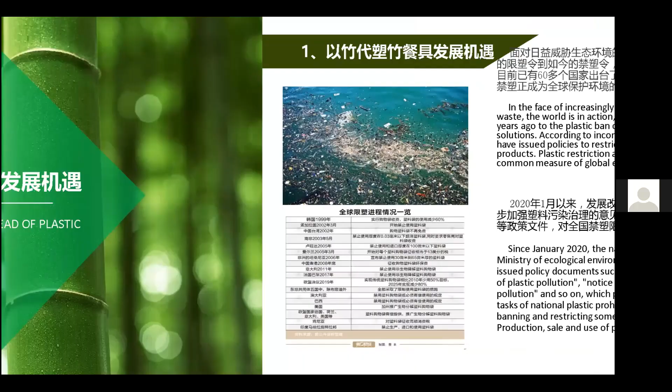Firstly, the bamboo tableware instead of plastic. In the face of increasingly threatening plastic waste to the ecological environment, the world has been in action since the plastic restriction order more than 10 years ago, and now with the plastic ban order, countries are actively looking for proper solutions. According to incomplete statistics, more than 60 countries have issued policies restricting or prohibiting disposable non-degradable plastic products. Plastic restriction and prohibition are becoming the consensus and common measures of global environmental protection.

Since January 2020, the National Development and Reform Commission, the Ministry of Ecological Environment, and other departments have successively issued policy documents such as Opinions on Further Strengthening the Control of Plastic Pollution, the Notice on Solidly Promoting the Control of Plastic Pollution, and so on, putting forward clear requirements for the phased tasks of national plastic prohibition and limitations. By 2020,

in certain areas, we have implemented the relevant policies already. By 2022, the consumption of disposable plastic products will be significantly reduced. By 2025, the management system for the production, circulation, consumption, recycling, and disposal of plastic products will be basically established, and plastic pollution will be effectively controlled.

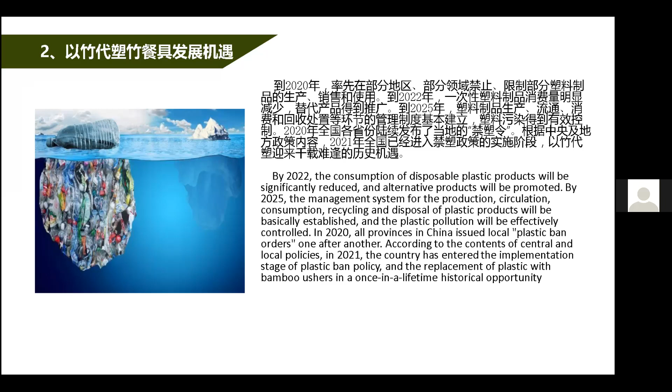In 2020, all provinces in China issued local plastic ban orders one after another. According to the contents of central and local policies, in 2021 the country entered the implementation stage of the plastic ban policy, and the replacement of plastic with bamboo ushers in a once-in-a-lifetime historical opportunity.

The opportunity for the development of bamboo tableware: coping with climate change, starting from replacing plastic with bamboo. On December 11, 2019, the International Bamboo and Rattan Organization and the International Bamboo and Rattan Center of the State Forestry and Grassland Administration of China jointly hosted the Bamboo Instead of Plastic side meeting to address climate change in the China Corner of the 25th Conference of the Parties to the United Nations Framework Convention on Climate Change.

The meeting aims to explore the potential and prospect of bamboo in solving global plastic problems and reducing pollution emissions, publicize bamboo's policies and actions to cope with climate change, promote the international community's attention to bamboo's natural solutions, and encourage all parties to integrate bamboo resources into national development strategies and action plans.

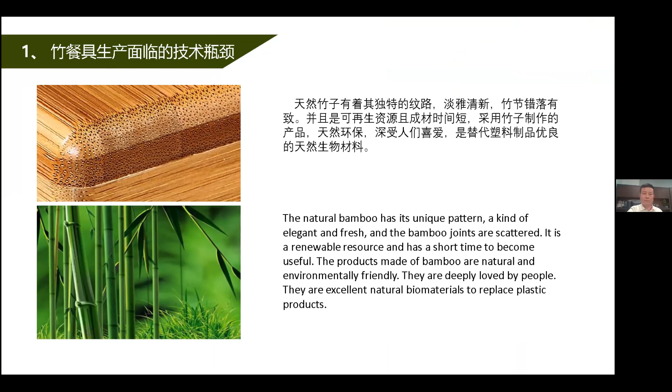Secondly, the technical bottleneck of bamboo tableware production. Natural bamboo has its unique pattern with a kind of elegant, fresh smell, and the bamboo joints are scattered in the right order. It is a renewable resource and takes a short time to become useful. Products made of bamboo are natural, popular, and environmentally friendly. It's a good material, a good replacement material for plastics.

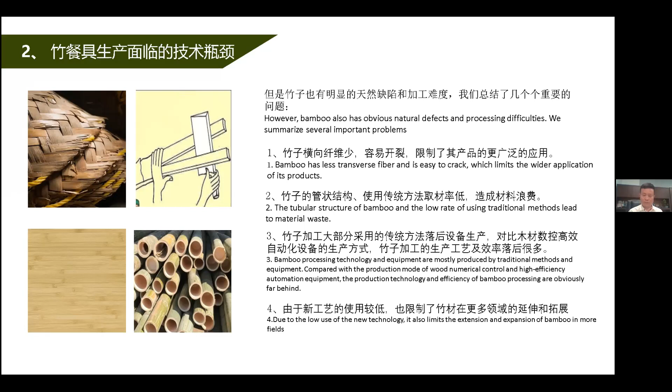But there is a natural difficulty in processing, and technical bottlenecks as well. Firstly, bamboo has less transverse fiber and is easy to crack, which limits the wider application of its products. Secondly, the tubular structure causes a low rate of material use with traditional methods, leading to waste. Thirdly, bamboo processing technology and equipment are mostly produced with traditional methods, which is less efficient, and due to the low use of new technology, it also limits the extension and expansion of bamboo into other fields.

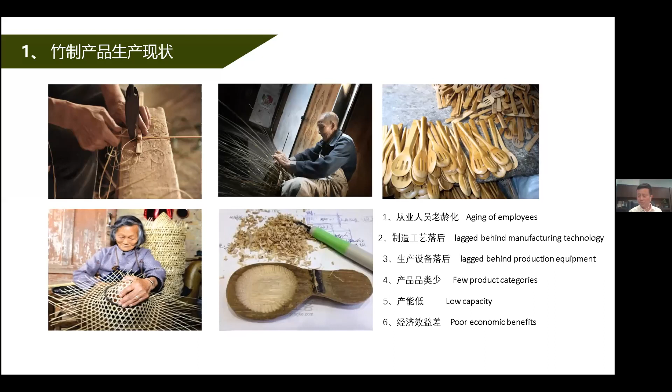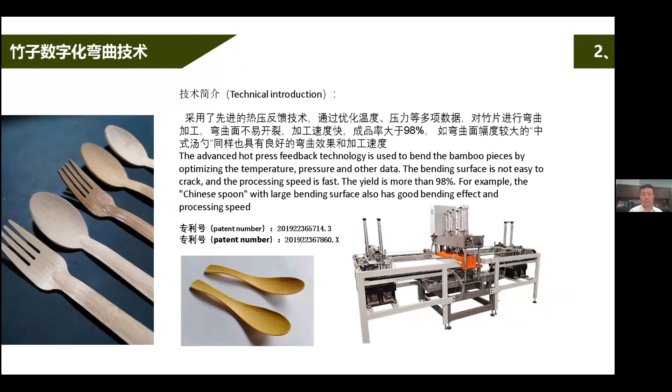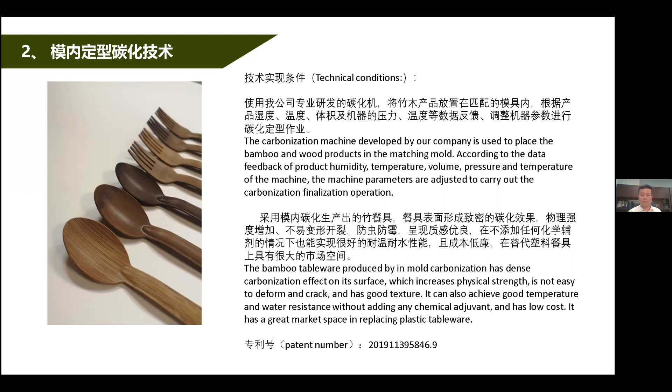Secondly, the in-mold setting carbonization technology. The carbonization machine developed by our company is used to place bamboo and wood products in the matching mold. According to the data feedback of product humidity, temperature, volume, and pressure, the machine parameters are adjusted to carry out the carbonization finalization operation. The bamboo tableware produced by in-mold carbonization has dense carbonization effects on its surface, which increase physical strength, is not easy to deform and crack, and has good texture. It also achieves good temperature and water resistance without adding extra chemical elements, and it has low cost. It has a great market space in replacing plastic tableware.

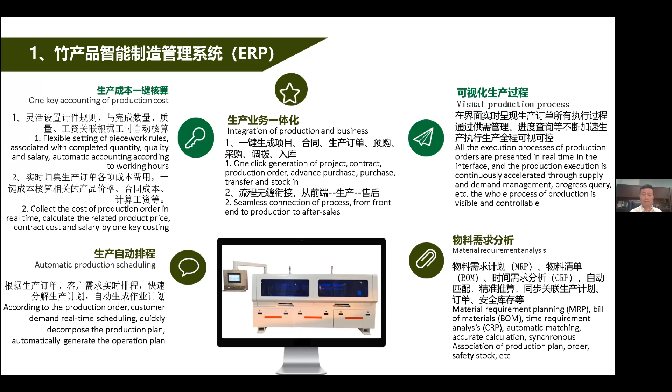Fifth, the efficient automatic production of bamboo tableware, using ERP integration of production and business. One-click generation of production contract, production order, advance purchase, transfer, and stocking, with seamless connection of process from front end to production to after sales. This includes automatic production scheduling, material requirements analysis, visual production process, and one-key accounting of production costs. This is actually a quite professional and complicated problem, and I won't go into much detail today.

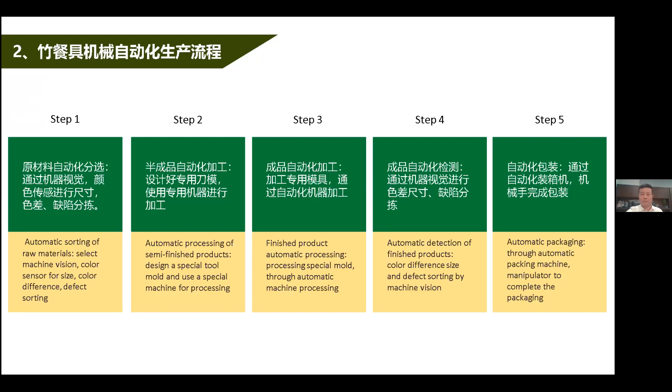Secondly, the automatic production procedure. Step 1, automatic sorting of raw materials, using machine vision and color sensors for size, color difference, and defect sorting. Step 2, automatic processing of semi-finished products. Step 3, finished product automatic processing, through automatic machine processing special molds. Step 4, automatic detection of finished products, checking color, sizes, and defect sorting by machine vision. Step 5, automatic packaging.

So finally, the company profile. Let me introduce my company briefly. Shanfeng Zhidong Technology Company was established in 2014. It's a comprehensive company integrating technology, R&D, intelligent manufacturing, sales, and maintenance. We are committed to the R&D of bamboo plastic substitute product technology and efficient automatic production equipment. It has successfully developed automatic production lines of disposable bamboo knife, fork, spoon, straw, bamboo coffee stick, and bamboo pan, etc. We continue to expand the use of bamboo instead of plastic industry, and we apply the technology in industry, agriculture, commerce, and various other fields.

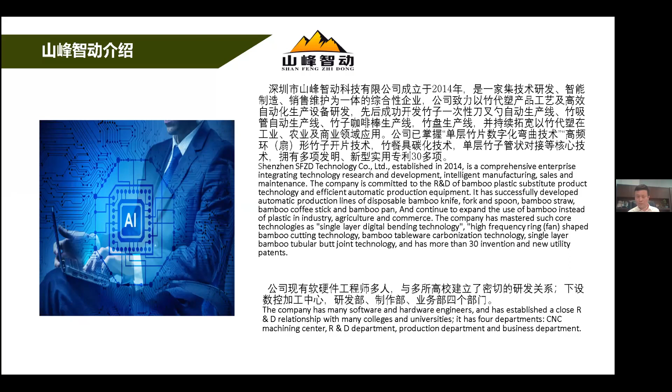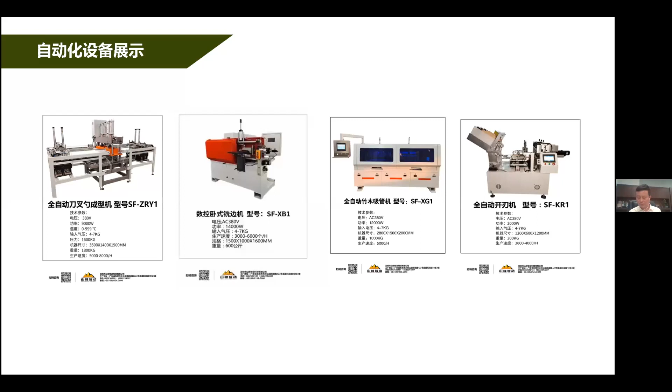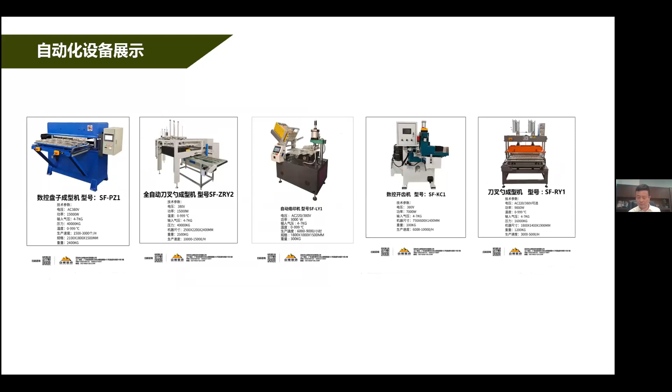So here is the display of the machines developed by our company. Here are some of the examples. We have tens of thousands of machines here, and we won't be able to go into details here.

Thank you, Ms. Liu, for your excellent presentation, especially this video which is very attractive. It's very impressive to see automatic manufacturing of bamboo tableware. Due to increased demand for bamboo tableware both in domestic and international markets, your technology will be very popular. And I hope you can also develop automatic technologies for wide bamboo processing.

Now the second speaker is Dr. Dai Wujun, Professor of Shenyang University, visiting Professor of National Advanced Packaging Material Engineering Research Center of Hunan University of Technology. Three major scientific research achievements of new bamboo materials, such as replacing plastic materials with bamboo, new pollution control products with bamboo, and green aldehyde-free building materials. He is the main researcher and inventor for 18 national patents. Dr. Dai's presentation is on carbonized composite bamboo woven geogrid, composite bamboo woven bag, and soil and water improvement using compound bamboo leachate and bamboo carbon. Dr. Dai, please.

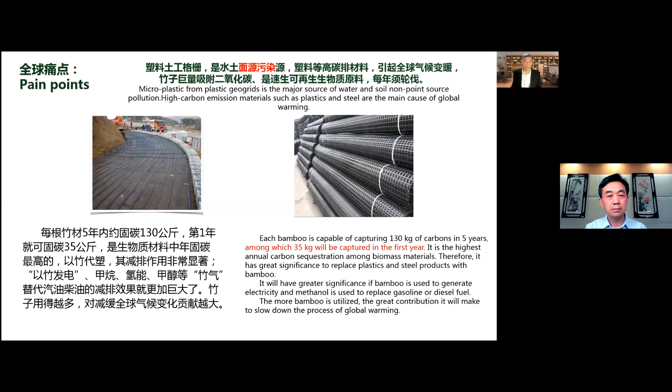About 20 to 30% of these bamboos should have been felled annually with an output of around 3 trillion yuan. But most of the felled bamboos are not utilized, but left wasted, which is a great pity.

Bamboo is famous for its strong capacity for carbon sequestration. Each bamboo culm is capable of capturing 130 kilograms of carbon in a 5-year period. This is possible thanks to the nodule bacterium in the bamboo roots.

Bamboo is able to sequester carbon because we use 1-year-old bamboo to produce our products. The bamboo is able to sequester 35 kilograms of carbon in the first year. I'd like to emphasize that 35 kilograms of carbon in the first year is the highest among all biomaterials.

In contrast, PVC or steel products are known for their high carbon footprint. Therefore, it is of great significance to replace plastics and steel products with bamboo.

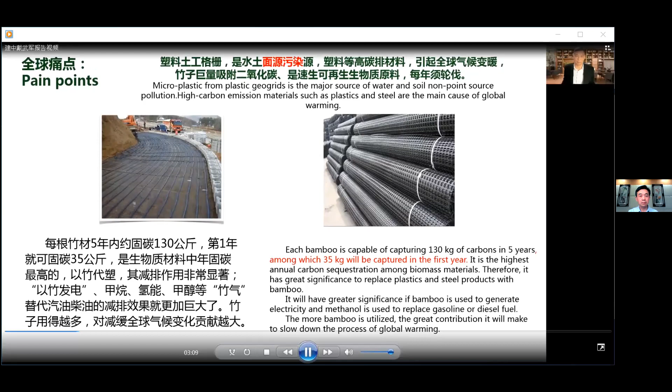Bamboo products can be used to produce green aldehyde-free building materials, to curb pollution, and to generate electricity. It will have greater significance if bamboo is used to produce methanol as an alternative for gasoline or diesel fuel. Therefore, it is fair to say that the more bamboo is utilized, the greater contribution it will make to slow down the process of global warming.

In light of this, promotion of carbonized composite bamboo geogrids will help reduce production and usage of plastics, as well as their pollution to water and soil.

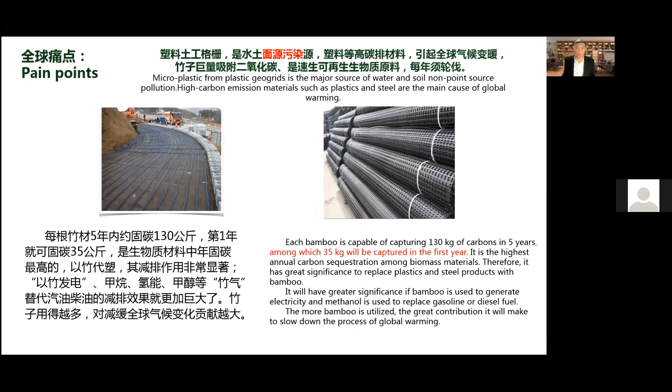Now, I'd like to introduce the first series of products to replace plastic. They include bamboo microfilament composite packaging materials, which will be used to replace plastic non-woven bags and plastic bags. In the near future, they can even be produced to replace other plastic packaging material.

Carbonized composite bamboo geogrids are used to replace plastic geogrids. Composite bamboo microfilament materials will be used to replace single-use cutlery and cups. Carbonized bamboo composite pipelines or pipes are produced to replace plastic pipes.

Now, I would like to give a brief detailed introduction to the carbonized composite bamboo geogrids that have already been put into operation.

The bamboo slips unearthed from Mawangdui tomb in Hunan province have stayed almost intact for more than 2,000 years. Today, we have good news to share with you, friends.

By working with academicians, doctors, and experts from Sun Yat-sen University, Chinese Academy of Sciences, INBAR, Tsinghua University, and Hunan University of Technology, we have made breakthroughs with 6 patenting technologies after 9 years of hard work.

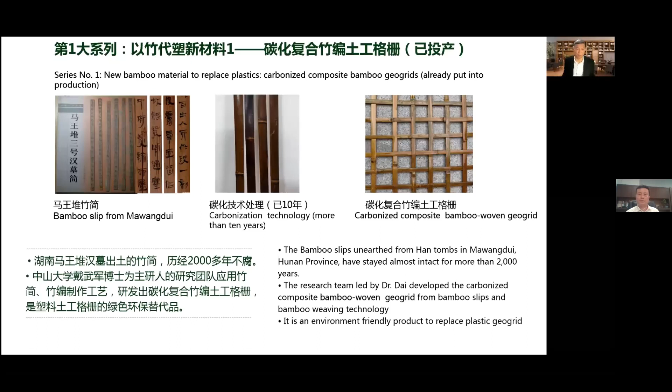Among these experts are President Tang Yiming of Hunan University of Technology and Dr. Dai Wujun from Sun Yat-sen University. The experts applied the techniques of bamboo slip making and bamboo weaving to develop the carbonized composite bamboo geogrids. So it is a great achievement.

President Xi Jinping makes it clear that the production, sales, and use of certain plastic products should be banned and restricted in an orderly manner, and the alternatives for the plastic products should be recyclable and biodegradable.

After the meeting, the government issued a ban on plastic products. I'd like to stress that on August 20th, 2020, the Guangdong province issued another ban on the landfills of plastic products. This indicates that microplastics in the soil are polluting the environment. In other words, they are detrimental to the environment.

To quote the UN meeting on climate change, bamboos are renewable energy with great potential to replace plastics.

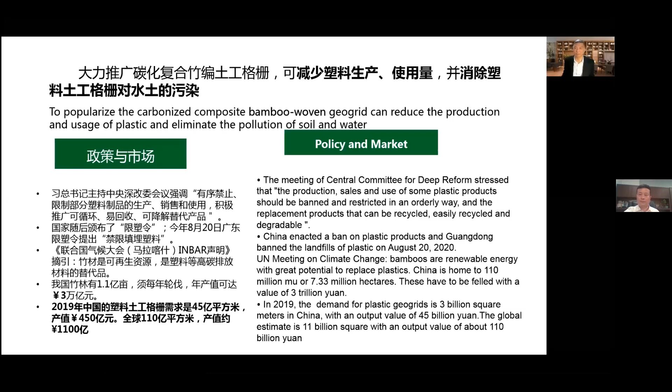Then what is the demand for plastic geogrids? In 2019, China's demand for plastic geogrids was 4.5 billion square meters with a value of about 45 billion yuan. Globally speaking, the demand was around 11 billion square meters with a value of about 110 billion yuan.

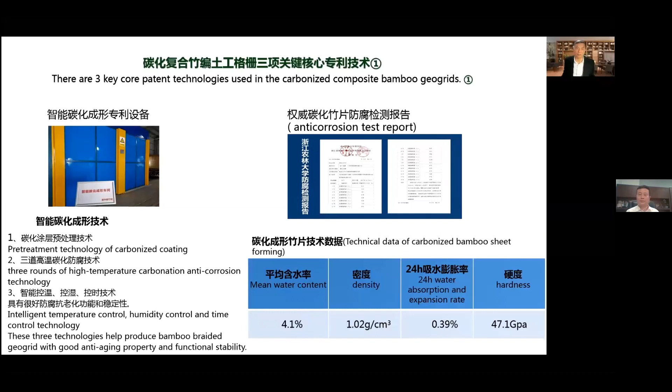Now let's look at the 3 key patent technologies used in the production of carbonized composite bamboo geogrids. Tech number one is intelligent carbonation technology, which can be further divided into three aspects.

Technology number two is CNC vertical and horizontal stress bamboo weaving technology, which also can be divided into three aspects: A, CNC automatic feeding technology; B, vertical and horizontal stress forming technology, which is based on the traditional bamboo weaving technology.

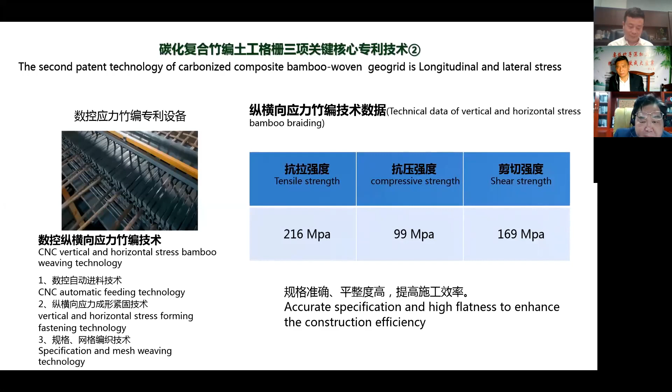This is also the highlight of this technology. The third, or C, is specification and mesh weaving technology.

Tech number three is also a core one: the polymeric bamboo weaving composite technology. This process is applied after the weaving and carbonation are done.

Aspect number one is the exclusive formulation technology of natural polymer strengthening agents. This natural agent is exclusively our invention. Aspect number two is the

polymer reinforcing agents with CNC dip and coating technology. The third one is compatible technologies of polymer strengthening agents with bamboo weaving technique. This is applied because the wax in the bamboo is not compatible with the polymeric strengthening agents, but the issue can be resolved after the carbonation treatment.

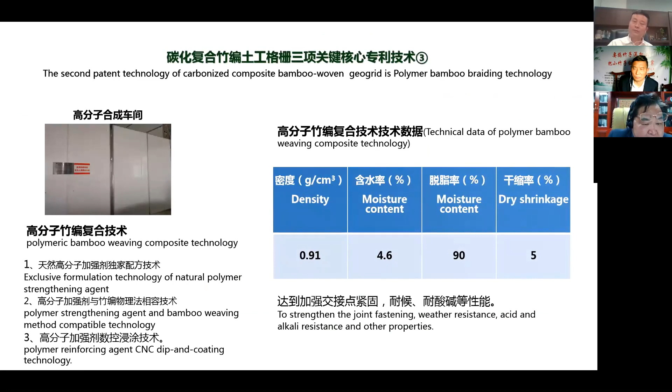Here is the on-the-site shoot of the production line of our carbonized composite bamboo geogrids, and now we have 5 production lines underway.

Carbonized composite bamboo geogrids are used in laying construction, with its special U-shaped carbonated bamboo rivet fixation. Compared with its plastic counterparts, this product is more durable, more elastic, easier to operate and joint, and more importantly, it is environmentally friendly.

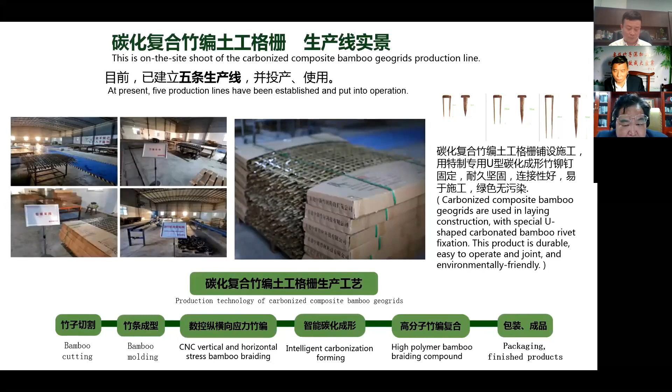This is the flow chart of our bamboo geogrids production. It starts from the cutting, then goes to shaping, CNC vertical and horizontal weaving, intelligent carbonation, polymeric bamboo weaving, and then packing for the finished products. So it is fair to say that our production model is very close to an integrative operational model.

This is a case of using carbonized composite bamboo geogrids. Already the bamboo geogrids has been used for road construction, covering an area of 500,000 square meters in Guangdong province.

We have been working with 2 companies. They are also the experts in our team, and they will promote our geogrids this year in their contracts. They are the top construction companies in Guangdong and also nationwide. They also took part in the building of the Hong Kong-Zhuhai-Macau Bridge. The two combined have a contract value of billions of yuan each year. Therefore, cooperation with these companies opens a bright future for our bamboo geogrids.

We are also working with Hainan Railway Company and China Railway Construction Company on the projects of the Sichuan-Tibet Railway, with the focus of using bamboo geogrids as slope protection. Therefore, applications of bamboo geogrids to ecologically delicate places is our target in the future because they can help reduce sand pollution.

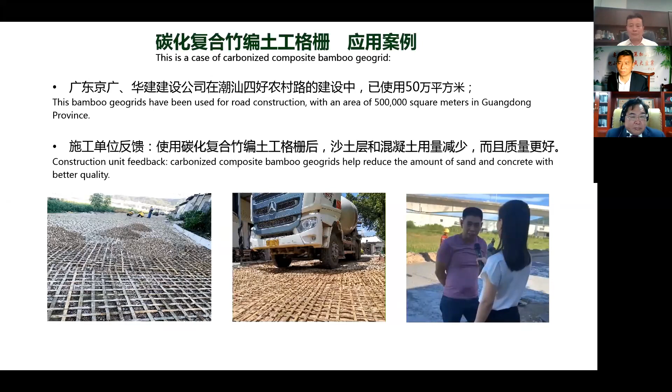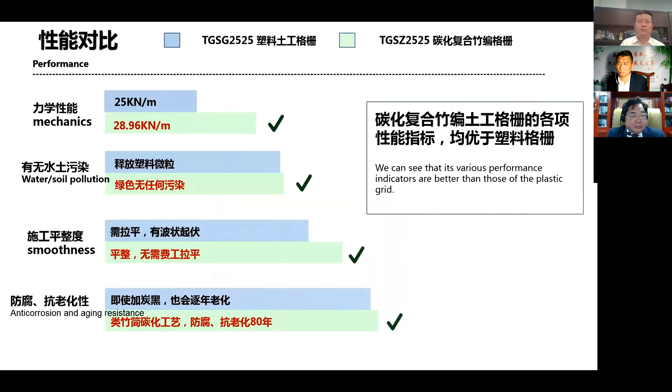Because the road surface is much smoother, we can see that bamboo geogrids' various performance indicators are much better than those of the plastic ones. In other words, the performance of the carbonized composite bamboo geogrids is much better, but the cost is much lower.

Here are the application fields for our bamboo geogrids. A bamboo can drive a whole industrial chain. There is bright and broad prospects for the carbonized composite bamboo geogrids. It is widely used in key areas, for example, agricultural facilities, construction of highways, railways, airports, wharves, river ways, and road revetment.

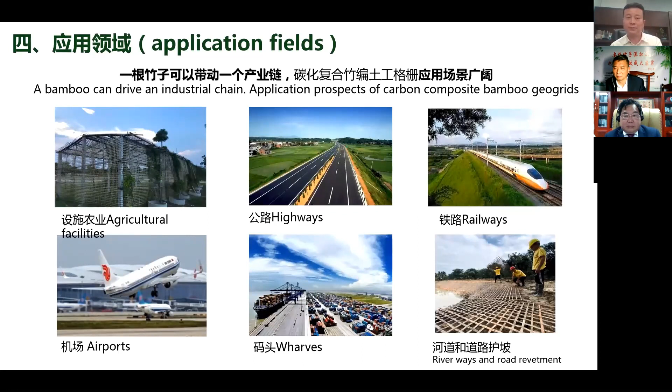And even today, some of us still use iron cages filled with stones to stabilize soil, and now they are using our products. Actually, as early as 2,000 years ago, China's bamboo cages filled with stones were used by Li Bing, the mastermind for the famous Dujiangyan weir, as slope protection. So this can be called the prototype of our bamboo geogrids.

Now I'd like to talk about the second product, replacing plastic with bamboo. Bamboo microfilament composite packaging materials are being explored to produce bags to replace plastic non-woven bags and other plastic bags.

They can replace other plastic packing material in the future. The production line is now underway. And we have composite bamboo cutlery and cups, as well as other composite bamboo materials, which will be explored to replace single-use cutlery and cups. The production line is also underway.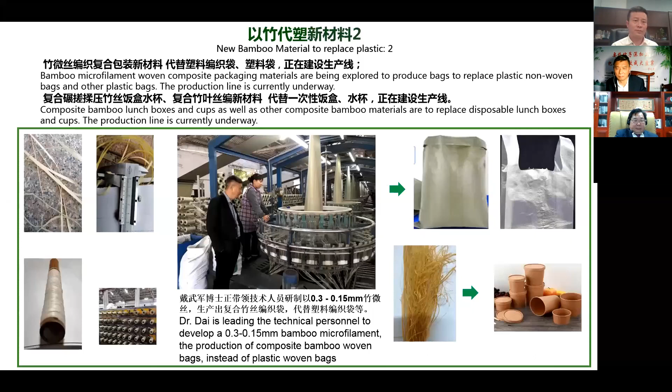So let's look at the picture in the middle. We have developed bamboo microfilaments as tiny as 0.3 to 0.15 millimeters to produce the bamboo woven bags. In the near future, these bamboo cutleries will be ready for the market, which is also a response to China's call for the ban on plastic products.

And also other crockery leftovers mixed with sea sand and polymeric composite agents and cements. Therefore, they are eco-friendly.

They are to replace the plastic pipes. So we can also say that the main selling point of these bamboo pipes is its high performance, but at a much lower cost.

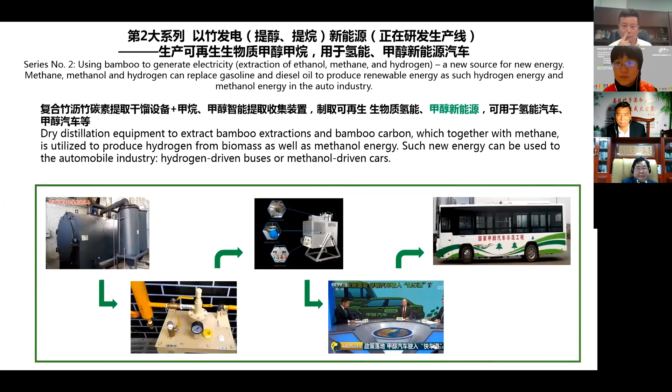Now let's look at the second series, that is using bamboo to generate electricity, a new source for new energy. Today I would like to draw your attention to using bamboo to generate electricity. We are going to renovate an old power plant into an eco-friendly powerhouse. This old power plant is located in Hunan province.

We will have large-scale production of dry distillation equipment to extract bamboo extractions and bamboo charcoal elements, as well as pyrolytic gas making from bamboo extractions, bamboo charcoal, and bamboo potash ashes to produce carbon monoxide, methanol, and methane to generate electricity. These gases so produced are called bamboo gas. And the first such bamboo gas power station will be constructed in about 2 or 3 months.

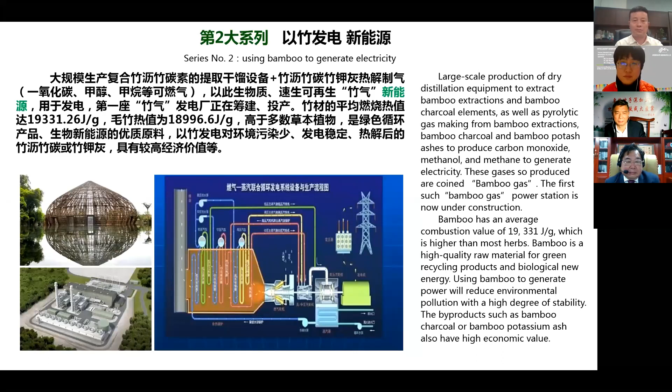We know that bamboo culm has an average combustion value of 19,300 joules per gram, while that of Moso bamboo is about 18,900 joules per gram. Both are much higher than most herbal plants. So bamboo is a high quality raw material for green recycling products and biological new energy. Using bamboo to generate power will reduce pollution with a high degree of stability. The byproducts such as bamboo extractions, charcoal, or bamboo potassium ashes after pyrogenation also have high economic value.

Here comes the number 3 new product, the third series, curbing pollution with bamboo products. The composite bamboo extractions and bamboo charcoal products derived from the waste and offcuts in the process of making new bamboo materials, combined with other byproducts, kitchen waste and straws, can be utilized to improve soil quality after they undergo physical and chemical processes. These soil conditioners are especially suitable for hardening soil with serious heavy metal pollution.

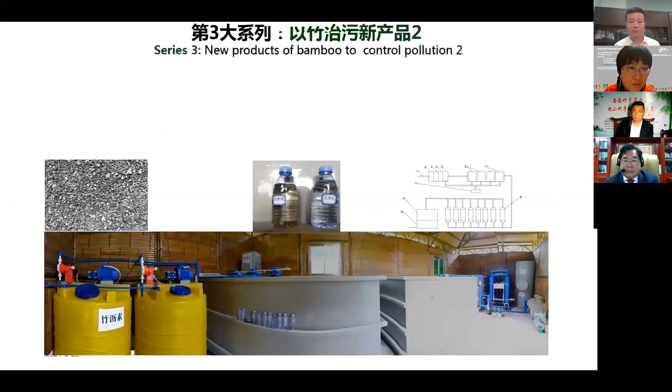I would like to recommend our techniques to extract polyoses from bamboo extractions. As we mentioned, there are various kinds of bacteria located in the bamboo roots. So the polyoses so extracted are conducive to soil purification, and they can help boost crop immunity or their resistance against pests.

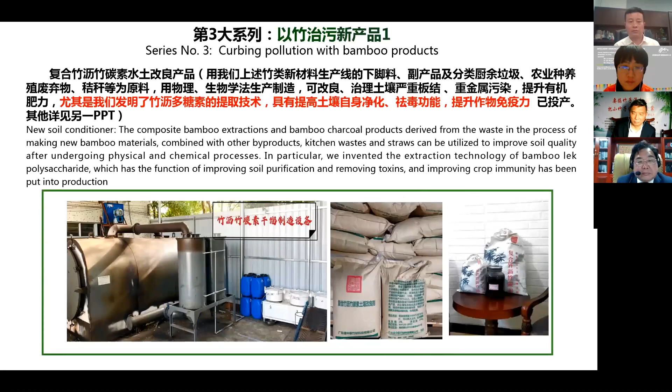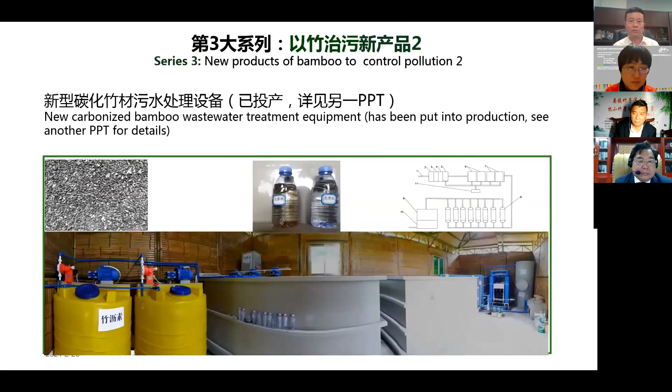This is our new product to reduce pollution. This is the newly developed carbonized bamboo sewage treatment plant. Due to time limits, there will be no elaboration here.

Now let's look at the fourth series of new products: green aldehyde-free new building materials and bamboo carbon graphene new materials. They can be both tensile and elastic. They can be used in windmill blades.

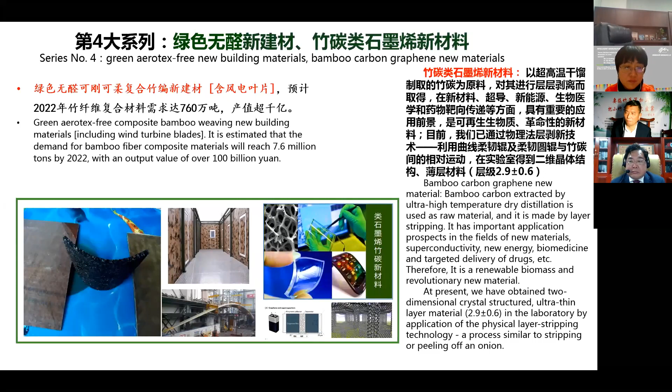The aforementioned three major scientific research achievements and four series of new products have been awarded 19 patent rights at the national level. Among them, the bamboo geogrid has been approved by experts nationwide by the Guangdong Administration for Market Regulation, INBAR, and China's National Forestry and Grassland Administration.

We have also established the quality standards and have submitted them to the National Standardization Administration for approval. At present, we are compiling the national standards for carbonized composite bamboo geogrids. We are also applying for international recognition for some of our key patents. These are patents recognized and authorized by the Chinese government.

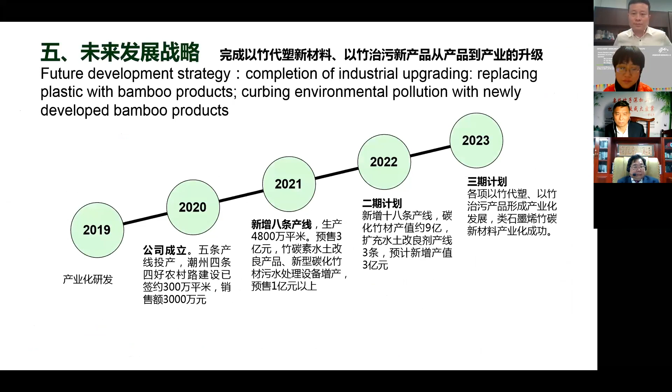This is our development strategy. We developed the bamboo industry as part of China's rural rejuvenation strategy. The newly developed bamboo products create a new high in science and technology innovation, filling the gap in the global markets for green biodegradable bamboo new materials.

Our mission is to replace plastic with bamboo, to reduce emissions with new bamboo products, to curb pollution with bamboo products, and to rejuvenate the rural economy with the new bamboo industry.

With our scientific achievements coming up one after another. Thank you all. Thank you all for your attention.

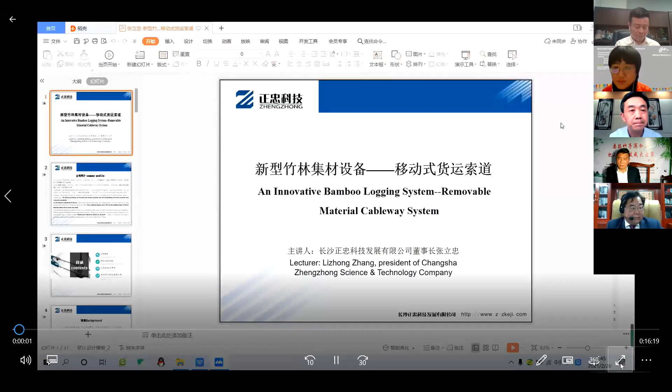My name is Zhang Lizhong. I'm the president of Changsha Zhengzhong Science Technology Company. The title of my lecture today is an innovative bamboo logging system, removable material cableway system. Let's start now.

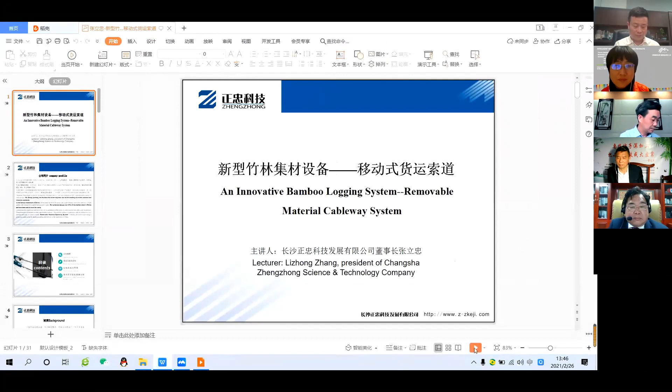Company profile: Changsha Zhengzhong Science Technology Development Company was founded in 2003 with registered capital of 22 million yuan. Mr. Zhang Lizhong, the founder and senior engineer, has led the drafting of several national and industrial standards.

As a famous trademark of China, Zhengzhong has been designing and manufacturing coal mine cableway of high quality with independent intellectual property rights. Our products occupy over 40% of the market share in China and have been sold all over the world.

Considering the experience and know-how we accumulated in the sector of cable traction and cable crane technology, Zhengzhong has determined to enter the bamboo industry. Through technical cooperation with enterprises from Austria and Italy, we have created a removable material cableway system, which is devoted to providing a systematic solution for bamboo cutting and delivery in the rural areas of China.

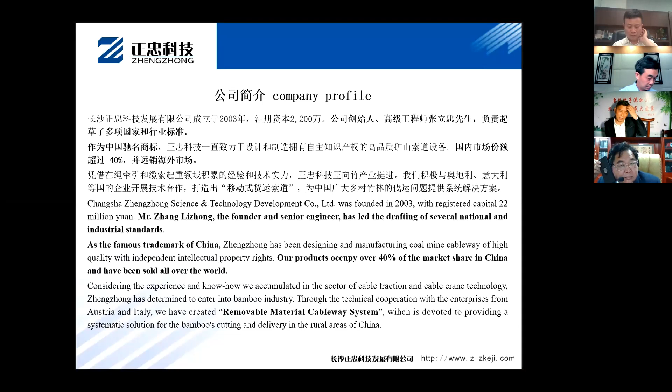The contents of my lecture: application background, theory and technical specifications, structures and sketches, and data analysis from technical and economic angles.

Background: China abounds in bamboo and bamboo species, which have been applied to every aspect of human life. Bamboo is well known for its short growth cycle, strong carbon storage, and wide application areas, which make bamboo an ideal material.

Current situation of the bamboo industry: first, insufficient utilization of bamboo; second, outdated machines and low further processing; third, high labor costs and shortage of professional talents; fourth, small size of bamboo companies with no leading enterprise in this field.

Current situation of China's bamboo machinery: bamboo equipment has been made since the 1980s, and our mechanical R&D capacity in this area is ahead of the world. However, compared with wood machinery from the perspective of technology, mechanization, and intelligence, bamboo machinery falls far behind at home and abroad. It is of great significance to develop bamboo machinery for the strategy of poverty alleviation and rural revitalization.

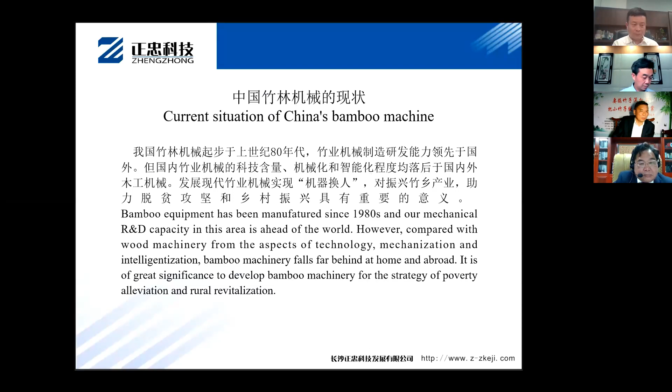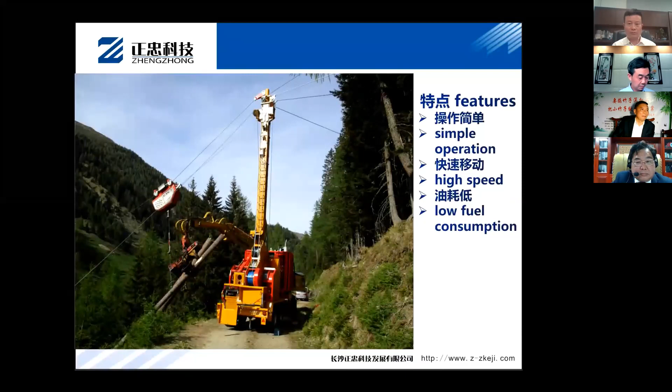Removable material cableway system: mature technology from Austria. Features: simple operation, high speed, low fuel consumption, simple loading and unloading, high flexibility, and environmental friendliness.

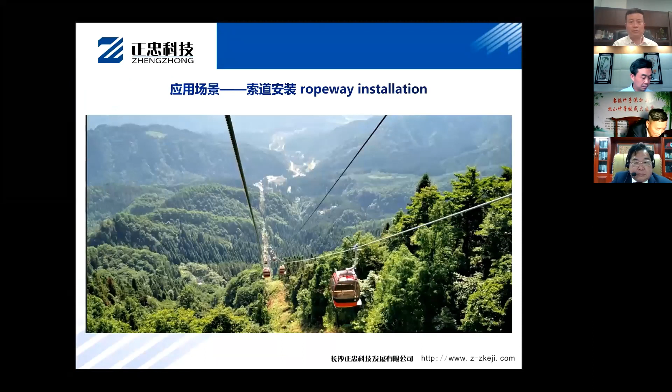Application scenes: power equipment transport, mountainous or scenic area construction, ropeway installation, and bamboo logging.

There is a video for the logging system. Sorry, it couldn't be opened. Let's go on.

Features of the bamboo logging system: first, removable - the cableway system shall be moved according to the bamboo forest. Second, the workplace has complicated terrain, which is not good for installation. Third, the workplace is always in a remote area weak in transportation, electricity, and communication, which adds difficulties to the installation of the cableway system.

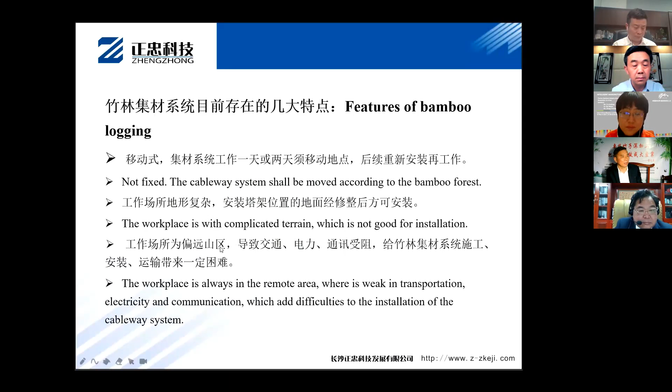Parts of the bamboo logging system: first, the main removable material cableway system; second, vehicles with the function of digging for assembly and disassembly of the system; third, automatic felling machines; fourth, mobile bamboo grinder.

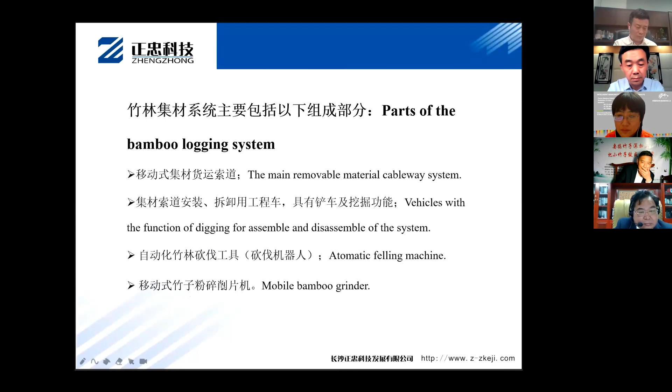Theory of the bamboo logging system: towers are set up between two points linked with one or more flexible cables, where carriages with pulleys are installed. The material can be carried between two points by pulling the cables, which are fixed on the ends of the carriage.

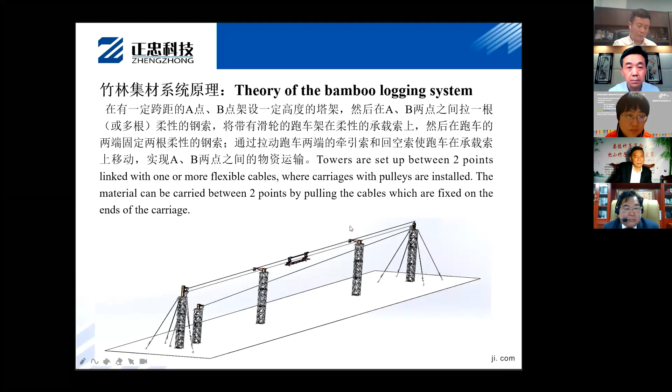Working cycle: carriage preparation, bundling with hooks, horizontal dragging, loads lifting, loads transporting, and dropping hooks to unload.

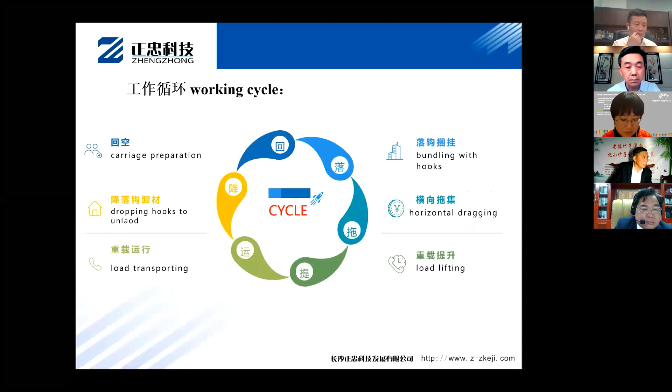Technical specifications: first, the height of the skyline is 5 meters. The moving distance of the carriage is 500 meters, and the distance between the skyline and the mainline is 0.4 meters. Second, the diameter of the skyline is 14 to 16 millimeters, and that of the mainline is 10 to 12 millimeters. The angle is no bigger than 25 degrees.

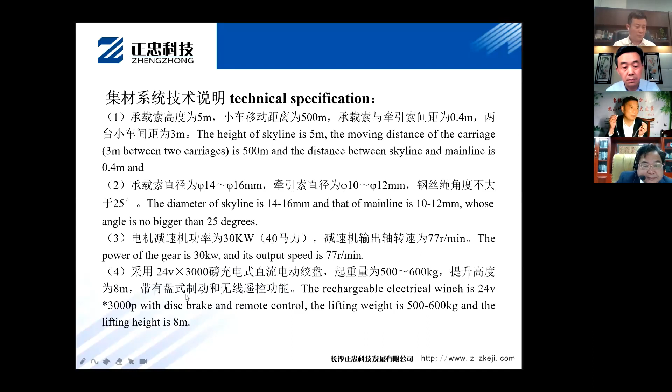Third, the power of the gear is 30 kilowatts, with an output speed of 77 rounds per minute. Fourth, the rechargeable electric winch is 24 volts with disc brake and remote control. The lifting weight is 500 to 600 kilograms, and the lifting height is 8 meters.

5. The tower is designed to be 360-degree removable, which is the center of the bamboo skidding.

6. The mainline cable is reciprocal, whose lifting weight is 400 to 600 kilograms, and its ends are fixed to the carriages with plates.

7. The diameter of the driving wheel is 700 millimeters. The mainline cable moves 2.2 meters per round. Its output speed is 77 rounds per minute, and the speed of the mainline cable is 170 meters per minute.

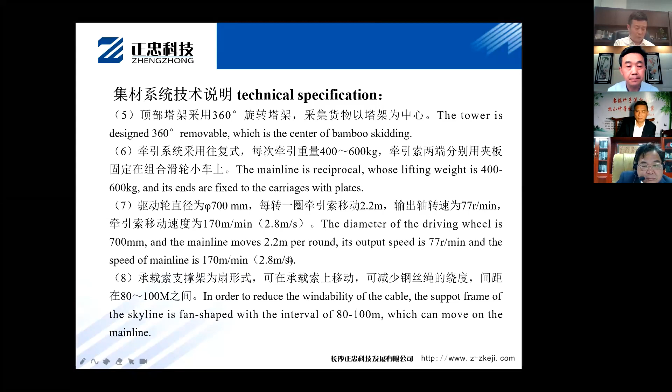8. In order to reduce the bendability of the cable, the support frame of the skyline is fan-shaped with an interval of 80 to 100 meters, which can move on the mainline.

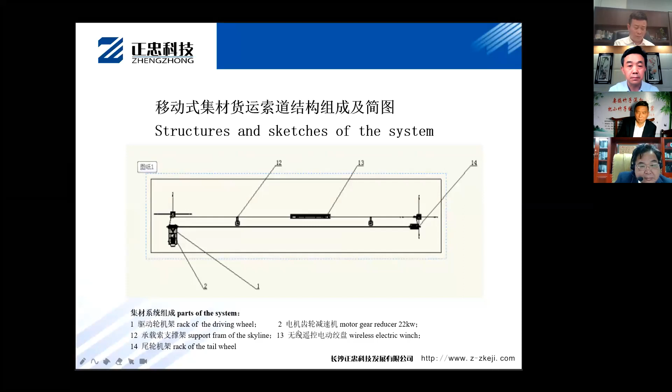Structures and sketches of the system. Parts of the system: 1. Rack of the driving wheel. 2. Motor gear reducer. 12. Support frame of the skyline. 13. Wireless electric winch. 14. Rack of the tail wheel.

3. Driving wheel. 4. Mainline transit pulley. 5. Skyline tower. 6. Skyline. 7. Mainline. 8. 360 rotating tower. 9. Tower bar. 10. Tail wheel. 11. Carriage with pulley. 15. Skyline.

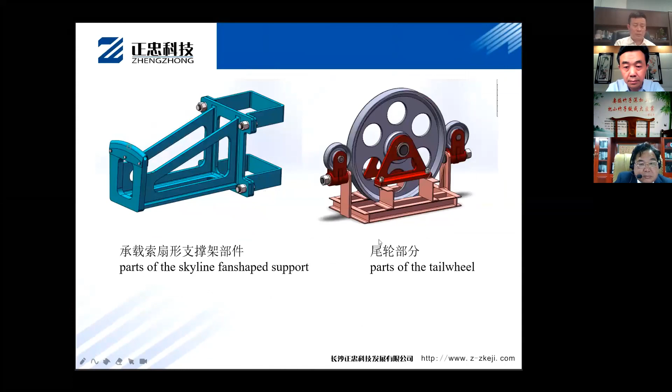Part of the rotating tower. Part of skyline/mainline tower. Part of the carriage. Part of the skyline fan-shaped support. Part of the tail wheel. Binocular drafting gear.

Data analysis. The mainline speed is 170 meters per minute. The time for moving back and forth is 6 minutes. The lifting time is 4 minutes. The whole time for each skidding is 10 minutes. Each cargo's weight is 500 kilograms. That is 3 tons per hour, 24 tons per day.

There are 4 persons in a team, so one person logs 6 tons a day, but in the traditional way, one person can only log 1.2 tons a day, so the working efficiency of the machine is 5 times faster.

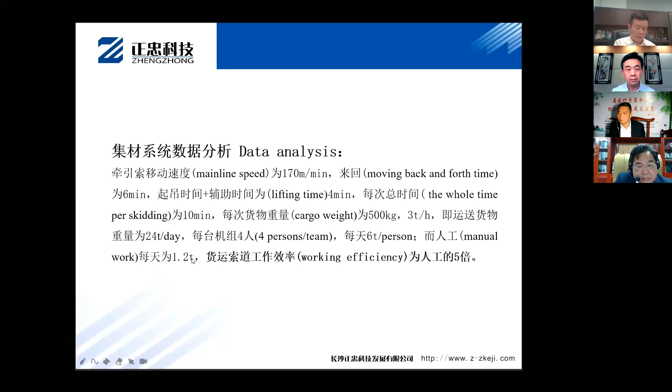Economic data analysis. Investment estimation. The price of the logging system will be 450,000 RMB. Other attachments and tools such as cables, lifting tools, blocks, and freight fee will cost 50,000 RMB.

The logging weight of the bamboo is 480 tons a month. The price of the bamboo is 400 RMB per ton. The total value is 192,000 RMB per month, that is 1,920,000 per year. The return period of the investment will be about 2.5 years.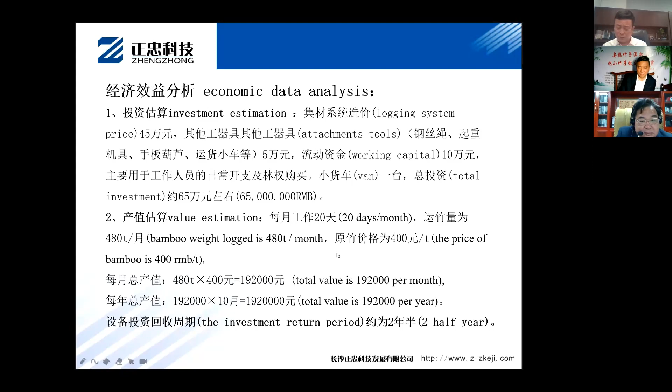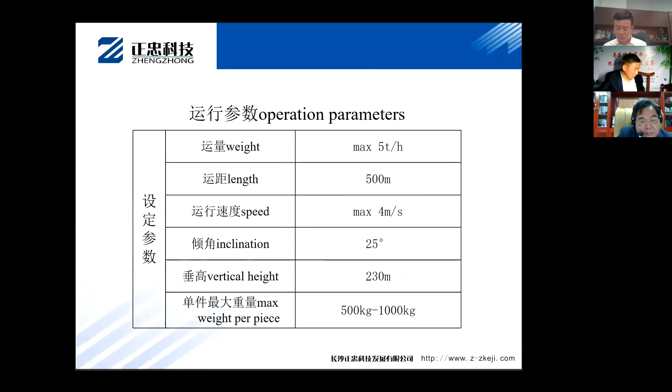Operation parameters: weight max 5 tons per hour, length 500 meters, speed max 4 meters per second, inclination 25 degrees, vertical height 230 meters. Max weight 500 kilogram to 1,000 kilogram.

Parts and attachments. Cables, skyline: diameter 14 to 16 millimeters, length 800 meters. Mainline cable: diameter 10 to 12, length 1,700 meters. Guy line: diameter 10 to 12, length 300 meters.

2. The direct motor gear reducer is 22 kilowatts. The output speed is 77 round per minute. The gear ratio is 19.04. The quantity is 1.

The electric smart winch is 24 volts. Lifting weight is 350 kilograms. The diameter is 5 millimeters. The length is 10 meters. The quantity is 2. Cable tension winch, 2.

Cable shackles, 100. Turnbuckle screw, 20. Rotating ring, 20. Snap hook, 30. Casing pipe, 30.

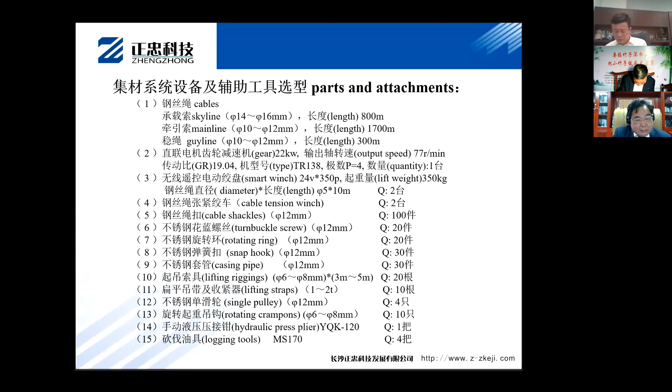Manual hydraulic press plier, quantity is 1. Logging tools, type MS170, the quantity is 4.